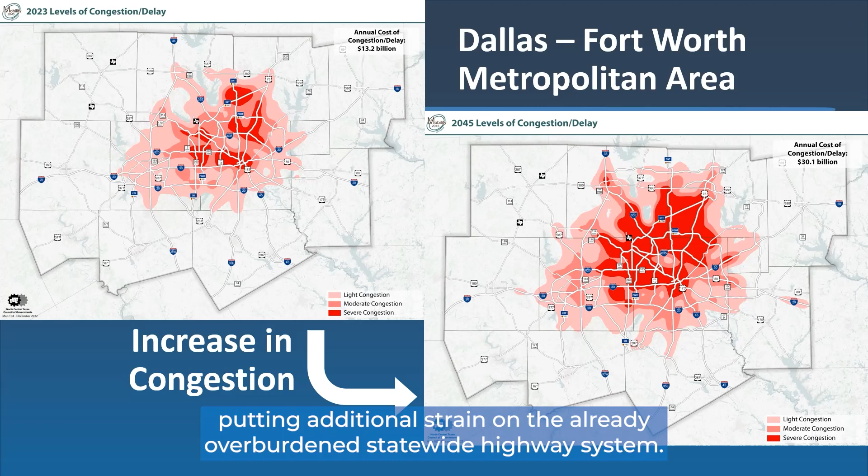With the expected growth in the Dallas-Fort Worth region, more travel choices are needed. Additional travel choices will increase connectivity to, from, and within the North Texas region, and will provide better travel time reliability, help improve air quality, and will lessen demand on the region's roadways.

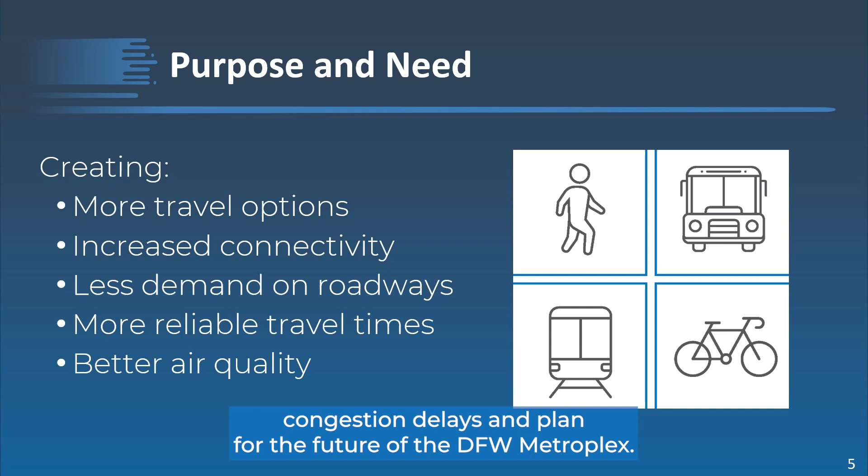To address this need, the North Central Texas Council of Governments has been conducting the Dallas-Fort Worth High-Speed Transportation Connections Study in the hopes to lessen congestion delays and plan for the future of the DFW Metroplex.

The primary objectives of this study are to evaluate high-speed transportation options between downtown Dallas and downtown Fort Worth. This includes analyzing both alignment and transportation mode options to connect Dallas-Fort Worth to other proposed high-performance corridor connections in the state, such as the Dallas to Houston High-Speed Rail Project, and to enhance and better connect the DFW regional transportation system. Several statewide studies have been done on high-speed rail and on other high-speed rail modes in the state,

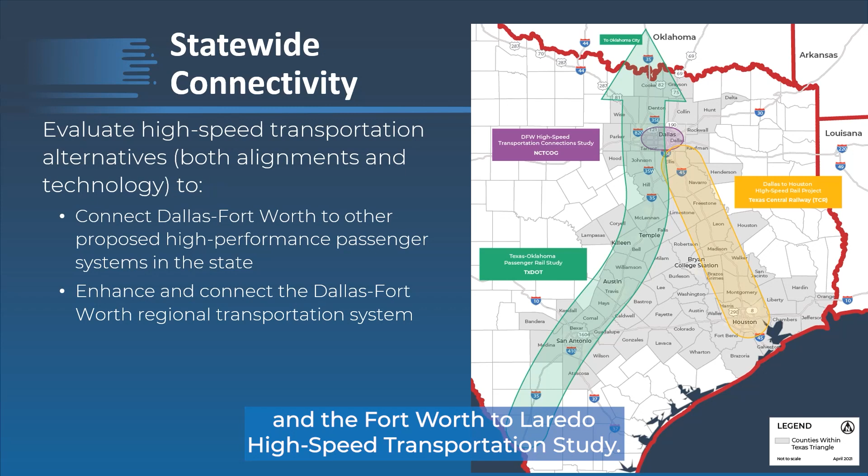including Texas Central's Dallas to Houston High-Speed Rail and the Fort Worth to Laredo High-Speed Transportation Study. The Dallas-Fort Worth study would connect the statewide system as planned by the Regional Transportation Council, which is the transportation policy board for the North Central Texas Council of Governments, through the Mobility 2045 update with a one-seat ride connecting to 3 stations within the Metroplex.

The first of these statewide options involves an upside-down U-shape that would allow the Dallas-Fort Worth High-Speed Rail Project to connect the Dallas to Houston High-Speed Rail to the proposed Texas to Oklahoma High-Speed Rail Project via Fort Worth.

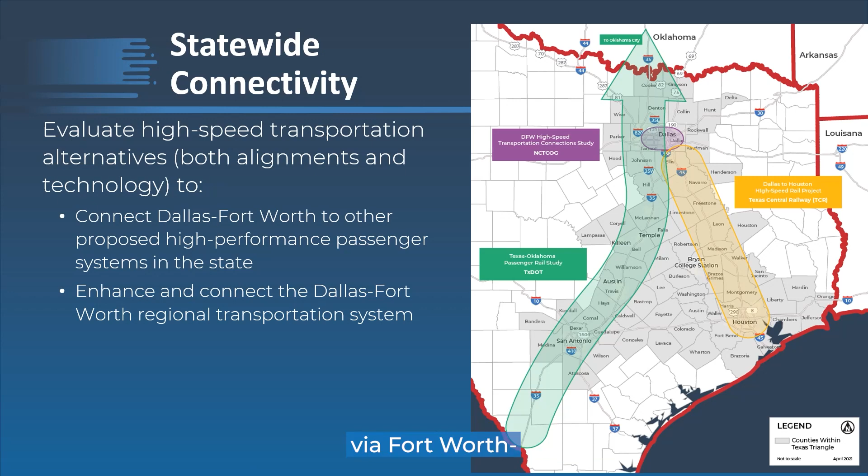Events over the past year have advanced new possibilities to a statewide system resembling a Texas T-bone structure as illustrated here. The Federal Railroad Administration has initiated several programs such as the Corridor Identification and Development Program and the Federal-State Partnership Intercity Passenger Rail Program to advance the planning and construction of new passenger rail corridors throughout the nation.

The North Central Texas Council of Governments submitted an application to the Corridor ID program to link the Fort Worth to Dallas project with the Dallas to Houston High-Speed Rail Project. Additionally, Amtrak recently announced their pursuit of a partnership with Texas Central on the Dallas to Houston High-Speed Rail Project.

With all of this recent momentum, now is the right time to advance the Fort Worth to Dallas project through the federal environmental process, setting it up to be one of the first high-speed rail projects in Texas.

Instead of an upside-down U system as discussed on the previous slide, perhaps the first high-speed rail project implemented in the state could be the Fort Worth to Houston, with a future high-speed rail corridor linking Austin, San Antonio, and Laredo to the Grimes County Station near Bryan College Station.

More coordination is needed between all potential partners to make the Texas high-speed rail vision a reality, both at the state and federal levels. The North Central Texas Council of Governments is committed to advancing those partnerships, ensuring the Dallas-Fort Worth region is seamlessly connected to a statewide system.

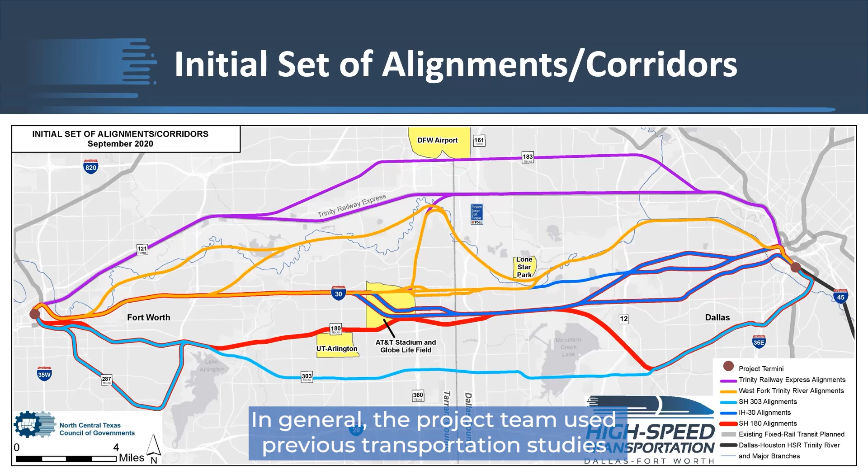In Phase 1, the initial study area covered over 230 square miles. The project team used previous transportation studies to identify alignments and corridors along existing transportation routes as much as possible to minimize the need to acquire additional property, minimizing impacts to existing homes and businesses.

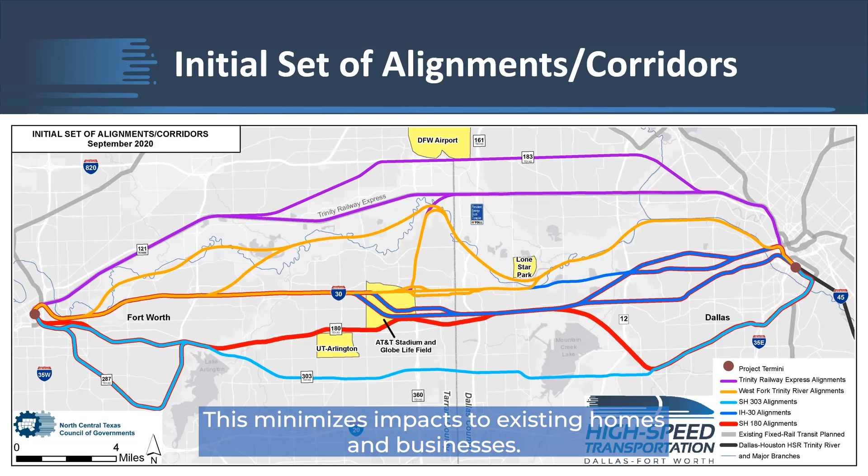Each alignment and corridor option connects downtown Fort Worth to downtown Dallas. In all, 43 distinct alignments and corridors were identified and analyzed in Phase 1.

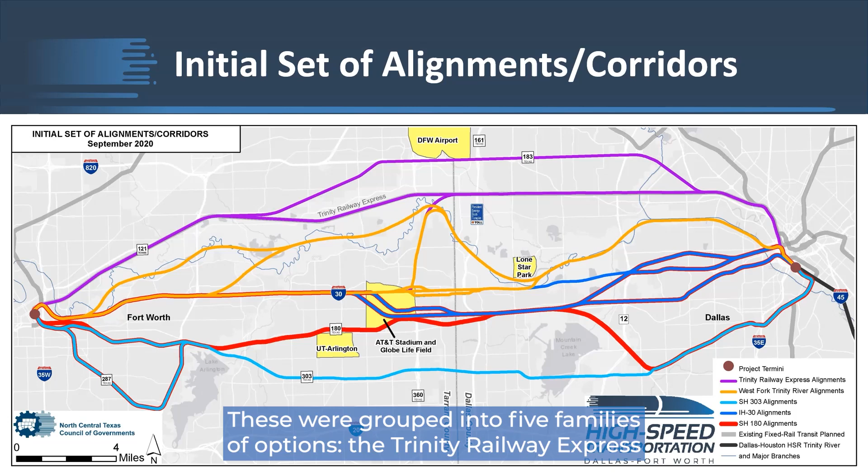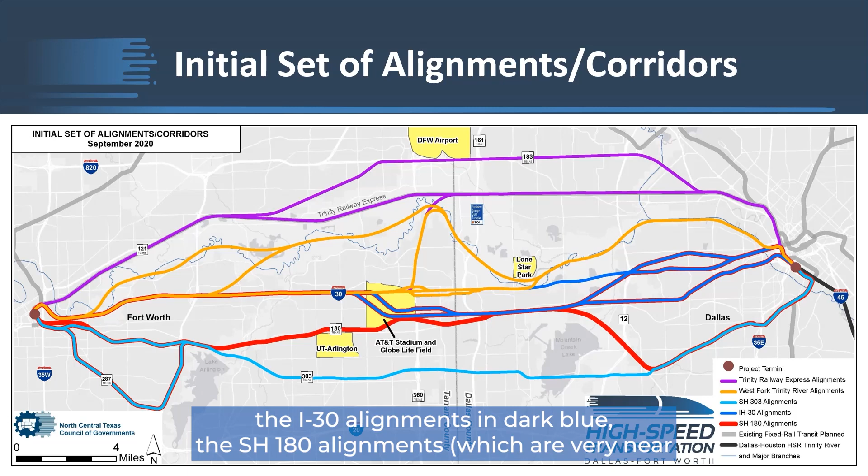These were grouped into 5 families of options: the Trinity Railway Express alignments in purple, the Trinity River alignments in gold, the I-30 alignments in dark blue, the State Highway 180 alignments, which are very near the existing Union Pacific Railroad alignment, in red, and the State Highway 303 alignments in light blue.

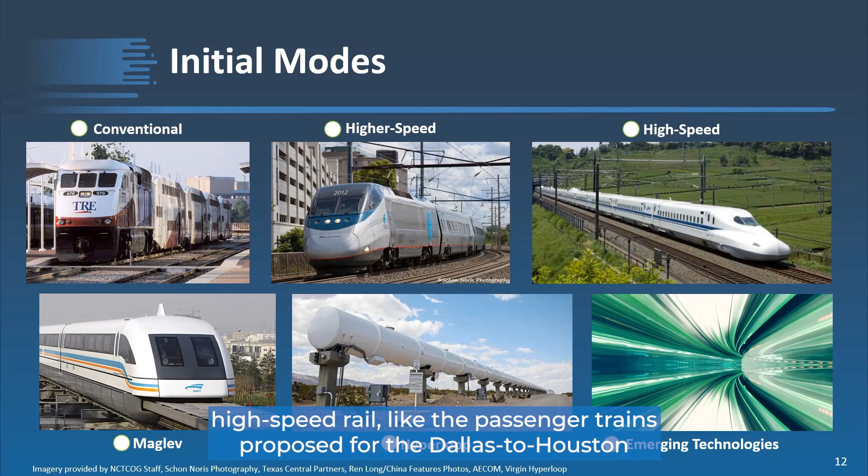5 transportation technologies or modes of travel were examined for their use to meet the region's travel needs. These included conventional passenger rail, higher speed rail, which are faster than conventional trains but slower than high-speed trains, high-speed rail like the passenger trains proposed for the Dallas to Houston system, magnetic levitation or maglev technology, and hyperloop technology, which incorporates a passenger or cargo pod moving in a near vacuum tube.

The project team also identified and considered other emerging transportation technologies.

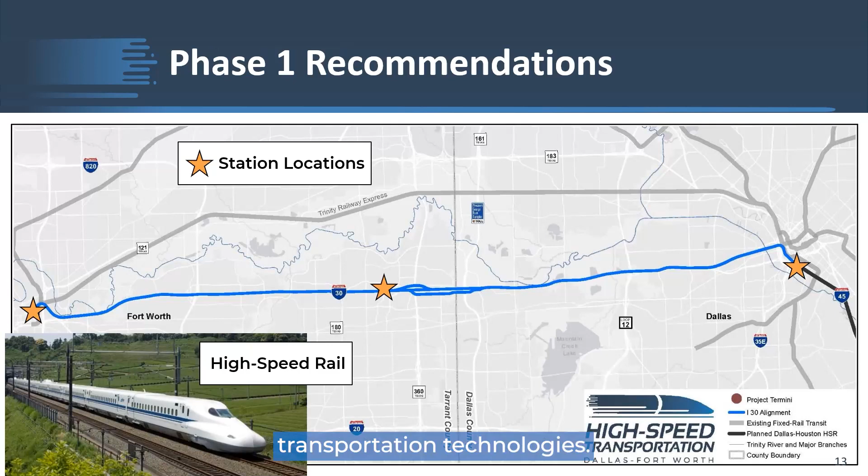After almost 2.5 years of study, the recommended alignment from Phase 1 generally follows the I-30 corridor between Dallas and Fort Worth with a proposed stop in Arlington.

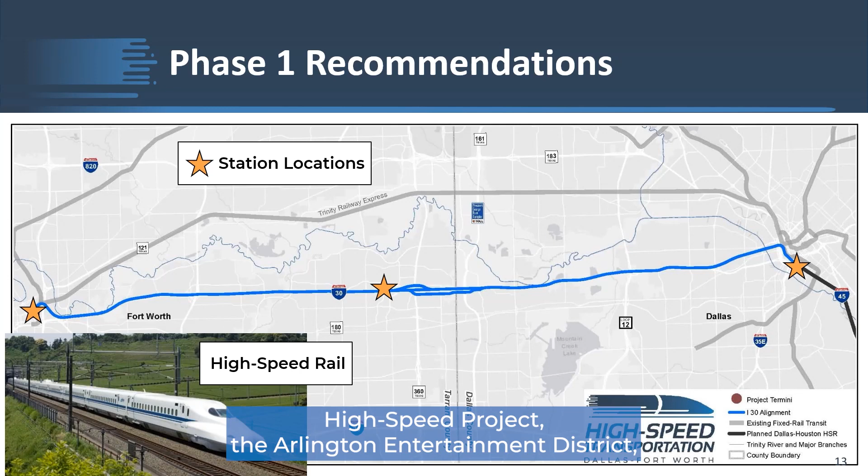The proposed station locations include the high-speed rail station in downtown Dallas for the Dallas to Houston high-speed project, the Arlington Entertainment District, and Fort Worth Central Station.

In Phase 1, the project team used a 3-level screening process to narrow down the initial vast number of possible options to a select few.

As the project team moved into Phase 2, we further evaluated alignment options along I-30, narrowing them down to a single alternative to be reviewed in the NEPA analysis and documentation process.

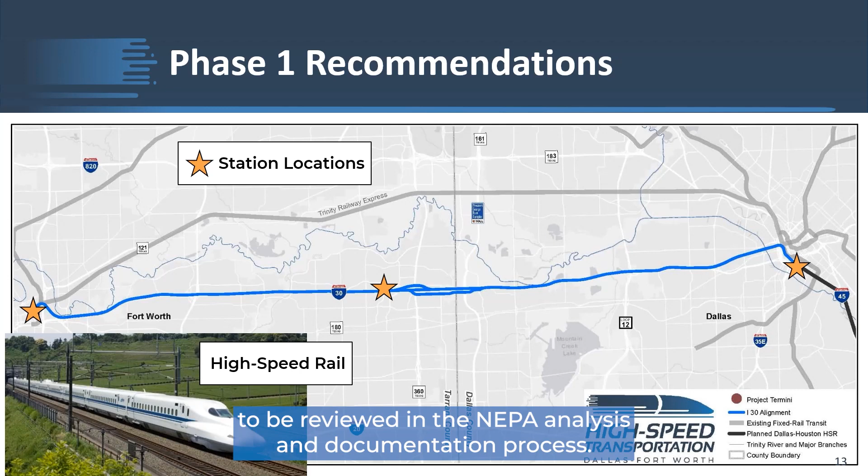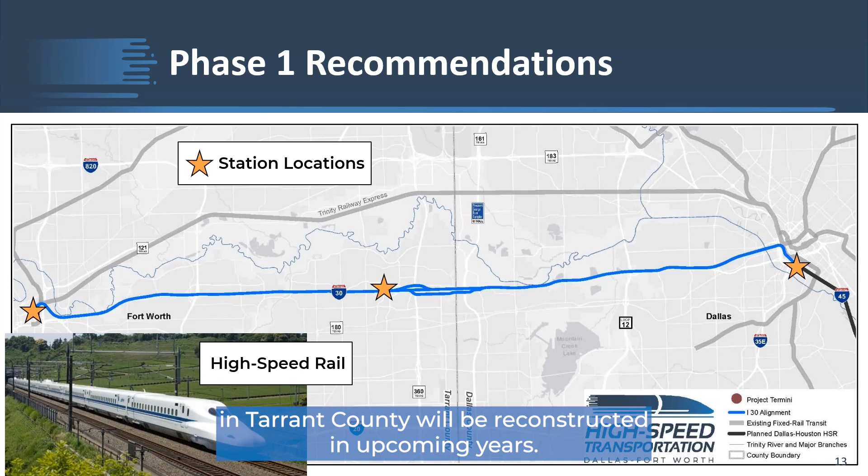The eastern section of I-30 has been reconstructed by the Texas Department of Transportation, while the western section of I-30 in Tarrant County will be reconstructed in upcoming years. TxDOT is currently studying options for this project, and construction of the DFW high-speed rail can be integrated in this design. The provided exhibits accompanying this presentation lay out this single proposed alignment in more detail.

The final recommended mode of transportation at the conclusion of Phase 1 was high-speed rail, which is the only mode that was carried forward into Phase 2.

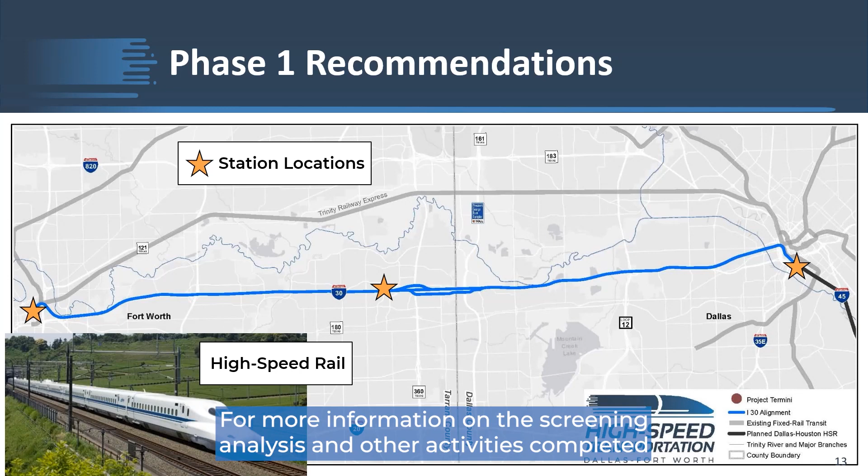For more information on the screening analysis and other activities completed in Phase 1, please review the Phase 1 Alternatives Analysis Final Report found under the Project Information tab on the project's website.

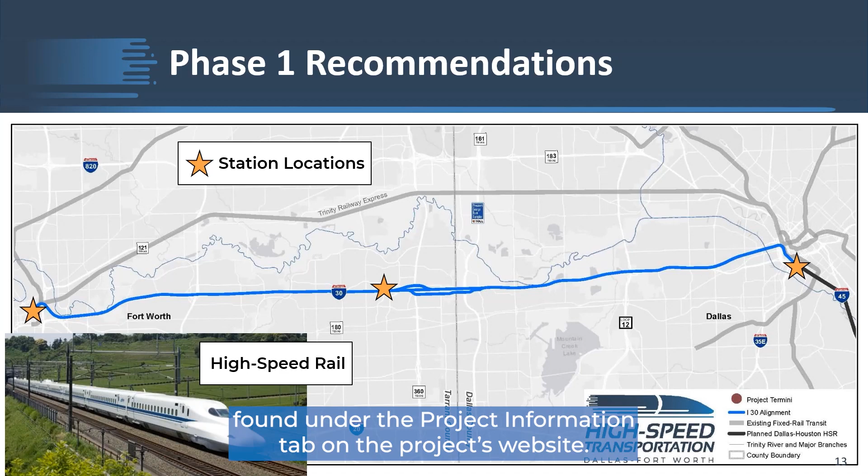The benefits of bringing high-speed rail to Texas include providing a one-seat ride from Fort Worth to Houston with stops in Arlington, Dallas, and Bryan College Station.

High-speed rail reduces carbon output as opposed to other transportation methods, including conventional rail, and is less susceptible to inclement weather when compared to traveling by car or plane, causing fewer travel delays.

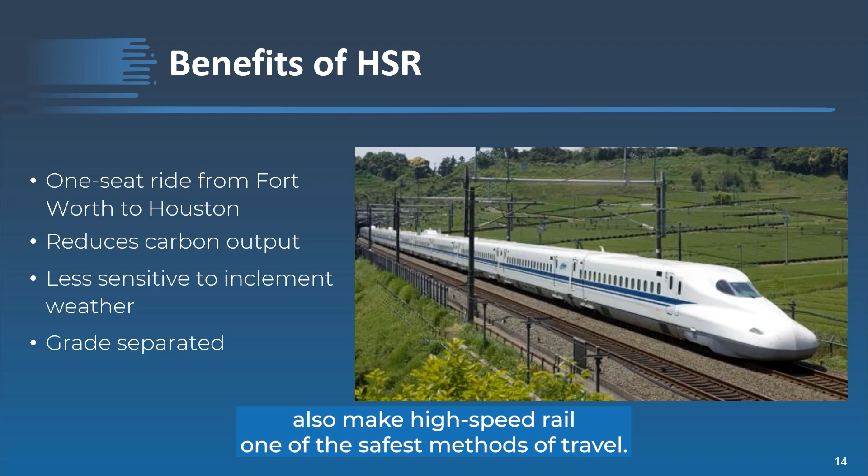Grade separations between railways and roadways also make high-speed rail one of the safest methods of travel. This will also allow for more reliable travel times.

Phase 2, Engineering and Environmental.

When we began Phase 2 of the study, we focused on refining and finalizing the alignment. We've continued to coordinate with the Federal Railroad Administration, Federal Transit Administration, Texas Department of Transportation, local governments, agencies, and major stakeholders to make sure that all voices continue to be heard. We are now ready to enter the NEPA process.

This will include preliminary engineering, environmental analysis and documentation, development of financial and project management plans, and ongoing public stakeholder and agency engagement.

During the NEPA process, effects on neighborhoods and community assets like parks and schools, air quality, noise, ecosystems, water, cultural resources, economics, and the transportation network are all considered.

NEPA requires federal agencies to consider appropriate mitigation measures during the NEPA process. This includes avoiding, minimizing, rectifying, reducing over time, and compensating for adverse impacts.

For example, a noise analysis will be conducted as part of the environmental impacts analysis. If a noise impact is identified, the project team will look for opportunities to avoid or minimize that impact. If avoidance and minimization is not possible, then mitigation would occur, possibly in the form of a noise wall.